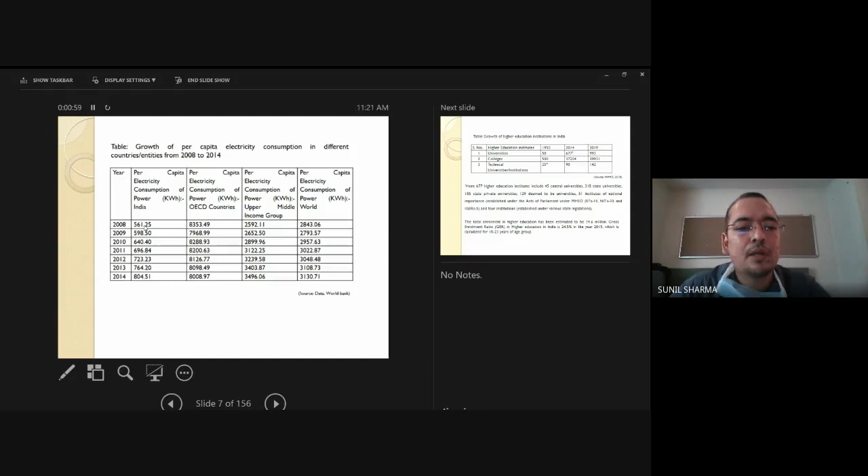And this table accounts for the per capita energy consumption in the Indian context and its comparison with per capita consumption in OECD countries and the world. There is a clear trend that per capita consumption is increasing, although it is very low compared to the world or the OECD countries. But yes, there is a substantial increase. It is growing from 561 kilowatt hour to 804 kilowatt hour per capita.

Likewise, the universities are also increasing. The growth rate of universities has been phenomenal from 1950 to 2019, and the technical universities have also increased 6 times, from 25 to 142.

Need for the study: almost 80% of the educational institutions and 50% of technical institutions were constructed prior to 2011-12, and 1/3 of these institutes have buildings that are more than 2 decades old. The students' intake is increasing. But the Energy Conservation Building Code is not being followed, as the code came into enforcement in 2005 and was then revised in 2017.

Most of the states are not following it, but traditional wisdom was taken into account, and eminent architects have designed most of the institutes. So they were actually having climate responsive buildings. And lack of energy metering at building level is another problem.

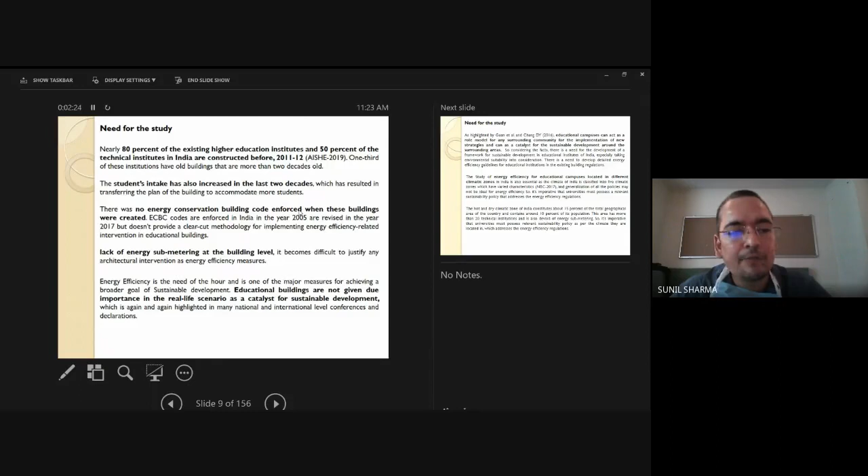And then educational buildings are not given due importance in the real life scenario as catalysts for sustainable development, which is again and again highlighted by national and international level conferences and declarations. Guan et al. and Chang in 2016 have highlighted that educational campuses can act as role models and as catalysts for sustainable development in the surrounding areas. But educational institutions are not given due importance in comparison to other buildings.

Energy efficiency for educational campuses located in different climatic zones is again a very essential part, because India is classified into 5 different climatic zones. So it is essential to have segregated but still comprehensive strategies for different climatic zones.

The hypothesis of the study is that implementation of appropriate architectural design significantly increases energy efficiency and reduces energy consumption in technical educational buildings in the hot and dry climatic region. So the research questions I was taking up are: the factors affecting energy consumption, the characteristics of existing educational buildings, the benchmarks related to educational buildings in hot and dry climate, and the appropriate design measures that can be incorporated for improving energy efficiency.

So likewise, the aim was formulated. The aim is to evolve strategies for achieving energy efficiency for technical institutional buildings located in the hot and dry climatic region of India. To fulfill the aim and the research questions, some research objectives were formulated, like to identify the scenario of energy consumption in technical educational buildings in India and specific to the hot and dry climatic region,

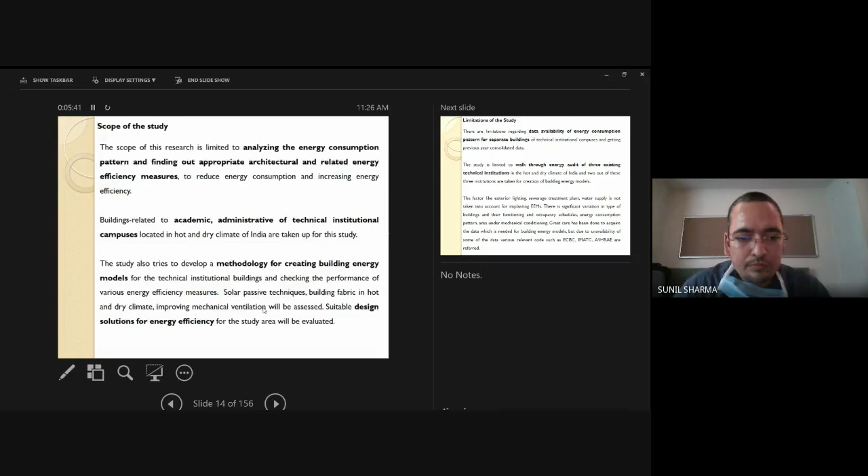The limitation is related to the data availability of the energy consumption pattern for separate buildings. The study is limited to walk-through energy audit only of the 3 existing institutes. The factors like exterior lighting, sewage treatment plant, water supply are not taken into account for implementing energy efficiency measures.

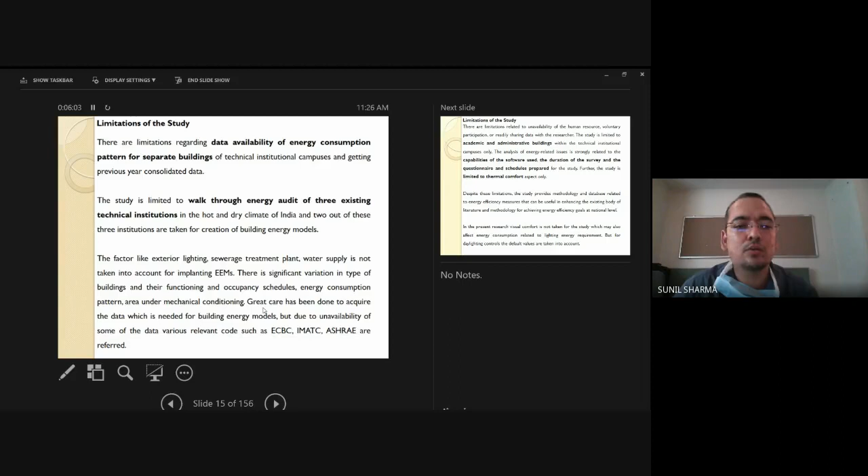And the study is strictly limited to academic and administrative buildings, or it may be a combination of academic plus administrative. The analysis of energy related issues is strongly related to capabilities of the software used, and in the present research, the visual comfort is not taken into account, and only the thermal comfort is taken into account.

Literature review. A vast literature review is carried out related to modeling building energy and calibrating the models, energy efficiency measures related to educational buildings, consumption pattern in multi-user buildings, role of various building elements, especially related to space type, which can be developed for benchmarks. Various codes and standards, sustainability declarations, policies, green rating systems, and software tools that can be used for simulation are studied in the literature review.

There are 3-4 important papers that I want to highlight that become, you can say, the backbone of the thesis through which important decisions are taken up. Like from this sustainability analysis paper, the various strategies like bottom-up approach, top-down approach or hybrid approach. So a bottom-up hybrid approach is taken for the study.

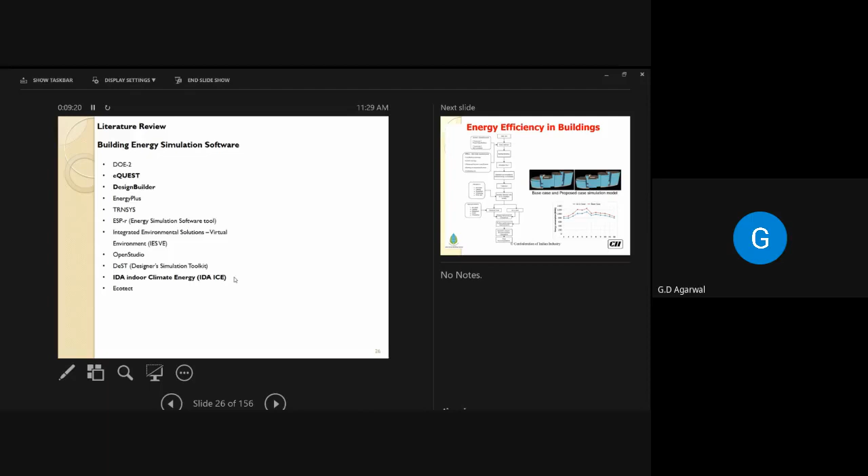Kindly mute your voice, because there is a disturbance. Kindly please mute your voices. There is a presentation going on.

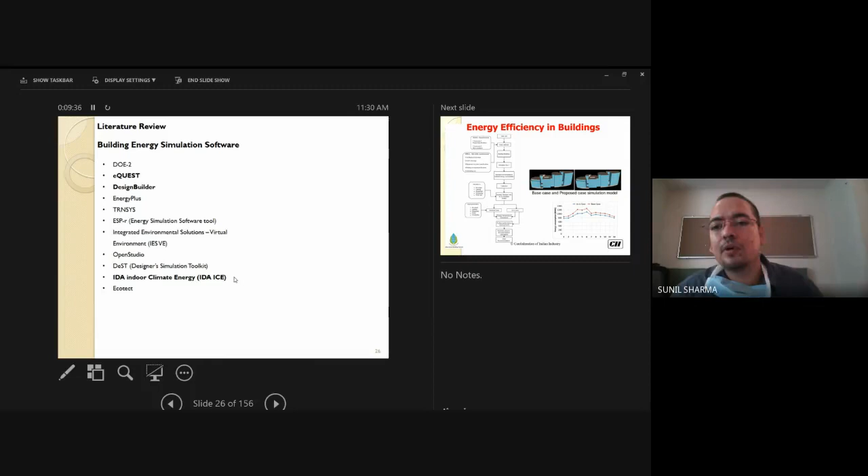So, literature review. For building energy simulation software, there are n number of software tools available, out of which eQUEST, DesignBuilder, and IDA ICE are favored by architects. And this is the flow chart given by the Confederation of Indian Industry. This talks about how you can conduct energy efficiency in buildings. So there is an established methodology, but this methodology is specific to a single case building.

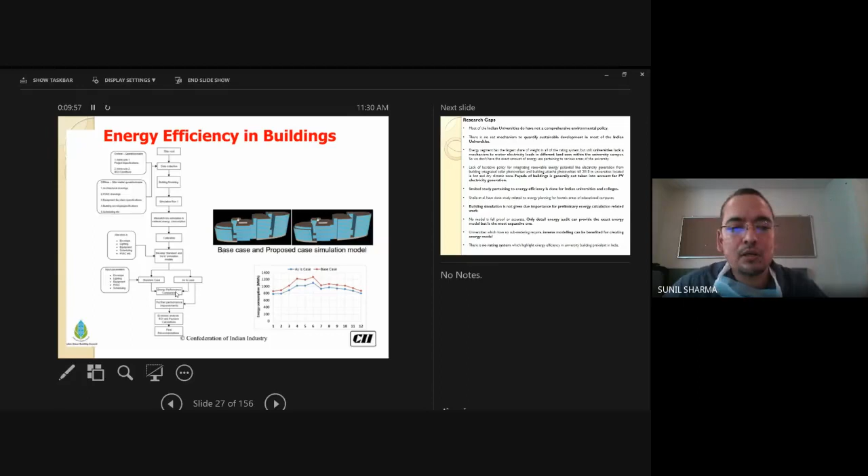Now, through the literature study, gaps have been found, like Indian universities don't have a comprehensive environmental policy. There is no set mechanism to quantify sustainable development in most universities. Universities lack mechanisms to measure electricity load in different land uses or different typologies of buildings. And prior to 2018, most universities, specifically in the hot and dry climatic region, did not have solar PV panels. Further, facade integration, building applied photovoltaics, is also not taken into consideration.

And there is a dearth of studies pertaining to energy efficiency in hot and dry climate, specifically in the Indian context. There are some studies, like Sela et al. has done a study related to the hostel blocks of the university. So most of the administrative, or the labs or the academic areas, are generally ignored.

Building simulation is not given due importance at the beginning of the energy efficiency work. And although only the detailed energy audits can provide the exact model, they are also expensive. Inverse modeling can be used for creating energy models in universities where sub-metering is not available. No rating till date is highlighting energy efficiency in university buildings pertaining to India. So these are the gaps.

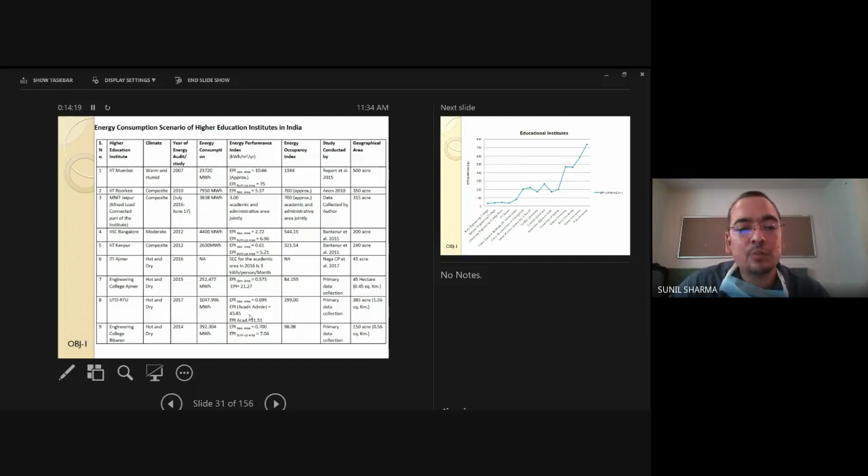You can say that there is a lot of variation in higher level, tier 1 institutes. They have a higher energy occupancy index as expected, because a lot of sophisticated equipment is there in these universities, and for ITI Ajmer it is not available at all. For my case studies, RTU Kota has almost twice that of Engineering College Ajmer and Engineering College Bikaner. As far as EPI is considered, for Bikaner it is just 7. For RTU Kota it is 43.8. So there is a lot of variation even within the state universities.

So the inference is that most of the tier 1 institutions have substantially larger consumption than the 2nd and 3rd level institutions. The EPI in comparison to educational institutions shows that Indian institutions have comparatively less, or very less. For the study area, the hot and dry climatic region, which constitutes around 15% of the area and 10% of the population, is taken up for the study.

This definition is taken from SP 41: the areas having temperature more than 38 degrees Celsius and relative humidity less than 40% prevailing during the hottest month of the year are classified as hot and dry. Here you can see the map of India taken from NBC, and this oblique shaded region is the hot and dry region, which covers most of Rajasthan, Gujarat, Saurashtra, Vidarbha, and some areas of MP and Maharashtra adjoining Rajasthan.

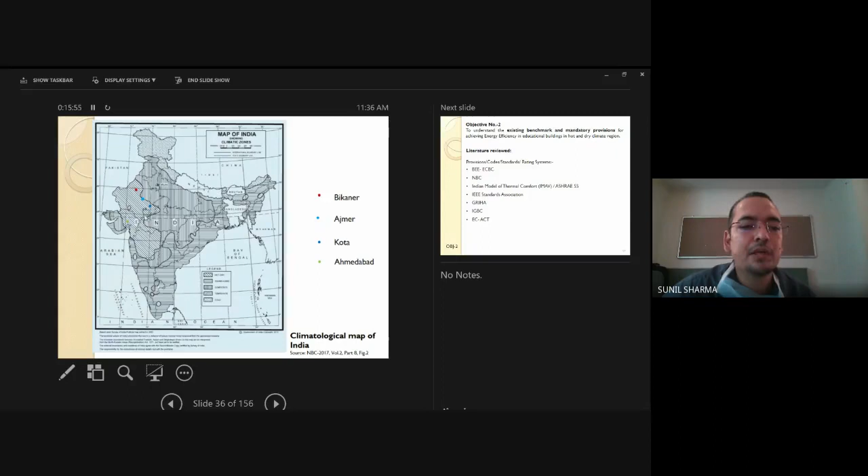For objective 2, to get the energy benchmarks, Bureau of Energy Efficiency codes like ECBC were taken up. NBC was studied. The Indian model of adaptive thermal comfort was taken up, IEEE standards, GRIHA, IGBC, and the EC Act. The EC Act provides a legal framework for energy conservation. Then the ECBC code: for the Bureau of Energy Efficiency, there are no set guidelines related to EPI of

universities or school buildings. Although there is an energy management guidebook, it provides recommendations related to energy efficiency, but does not give benchmark values. For commercial and institutional buildings they give 150, 170. These are on the very high side compared to my preliminary findings for my study area, which were hovering around 20 to 30. So again, the EPI given by the Bureau is on the higher side for institutional buildings.

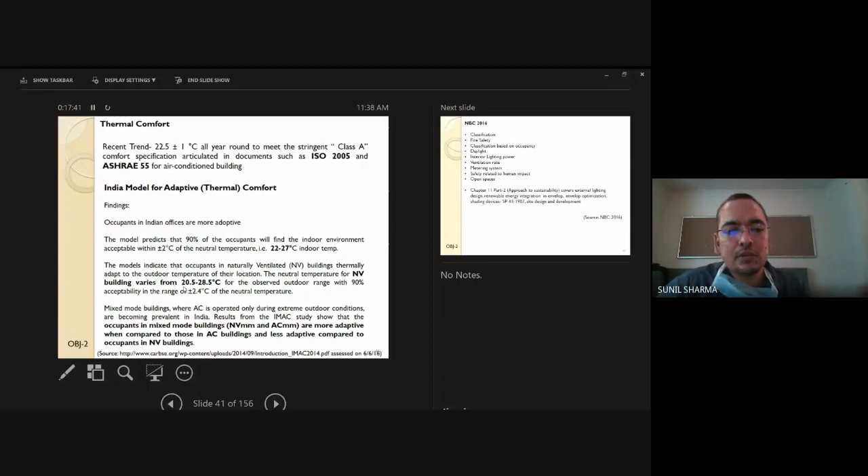For thermal comfort, the Indian model of thermal comfort is taken up, developed by CEPT University, and this is an ideal platform to apply it, because most of my buildings are naturally ventilated. 90% of my building areas are naturally ventilated. So boundary conditions of 20.5 to 28.5 degrees Celsius are taken up.

So again, it's not ideal to take any of these benchmarks. If you take 140 as a benchmark, it means our buildings are super compliant. If you take ECBC, then they become super ECBC compliant, but that is not the actual case. So that is one of the reasons the study is taken up.

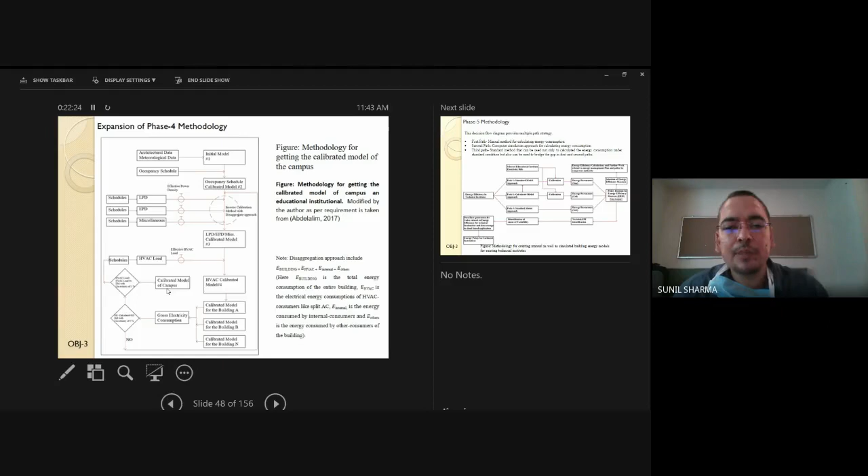If it is not, then I have to check the schedules of the HVAC equipment installed in my building. So there is a complete chain, and there are 2 checks involved. This is how the manual model was initially created, so that data is available for further simulation work, because simulation has a lot of parameters, and these manual computations are necessary to fulfill some parameters which are not found through the survey.

And then we can run the energy efficiency parameters, and then we can do the analysis, and then finally the database can be generated for the university, which can be the base for the energy policy for that particular institution.

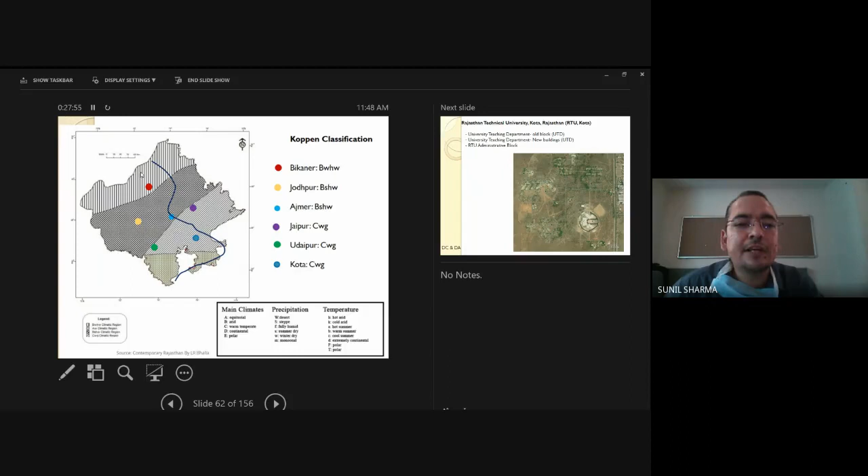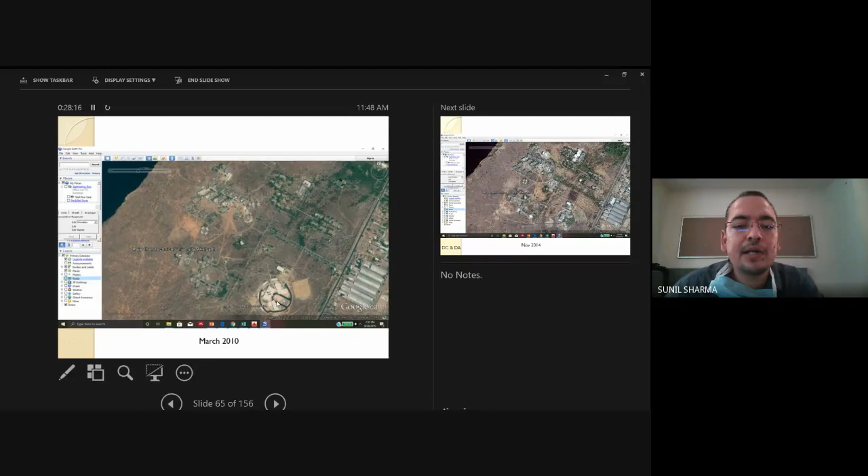Now this is Kota. This is 2005. You can see this is the old academic block known as UTD, University Teaching Department. There is nothing here. Now here in 2010, the administrative block came up with VC building, registrar office, examination office, and sports complex. Then the computer department came up in 2016.

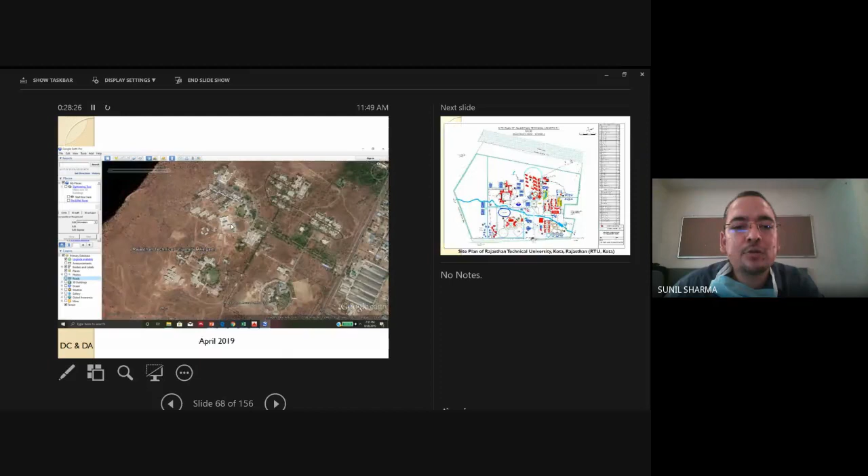And in 2019, there is another petroleum department that came up. So this is the master plan. These are the glimpses of the university.

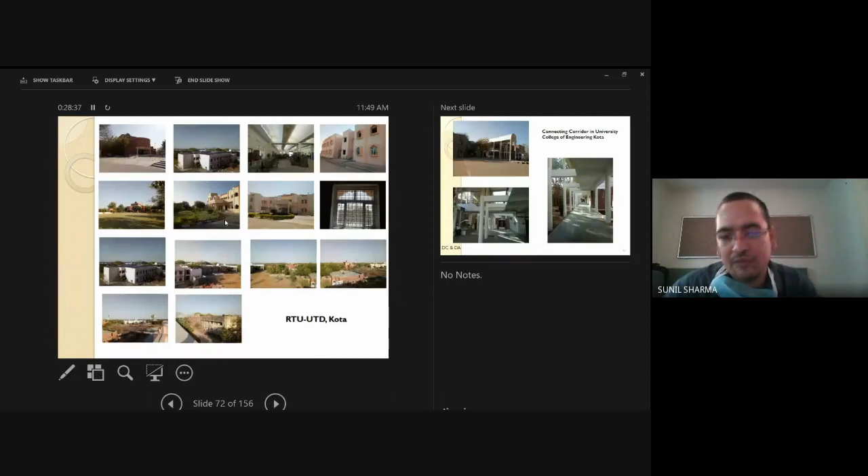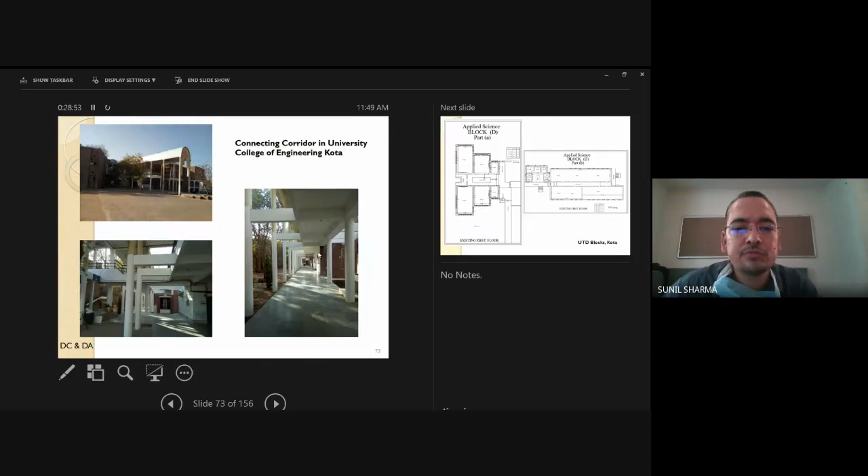I will just highlight that they have these vaulted corridors, double height corridors to connect the old buildings. So the old structure has some kind of architectural motifs. This is again corridors which are connecting different blocks. These are the maps. This is a newly constructed building, the computer department.

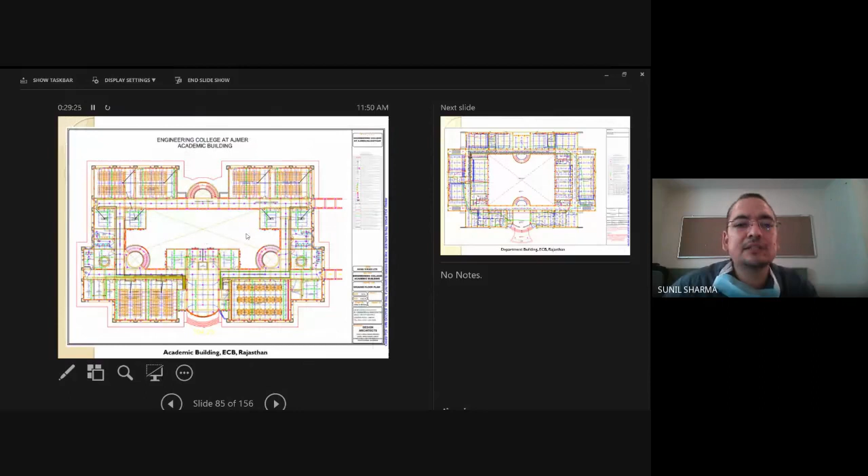Here you can see that courtyard buildings are there. So the academic and the department, two buildings are studied for Ajmer. They have courtyard type of planning. This is again a very striking feature, the shaded corridor and the western facade.

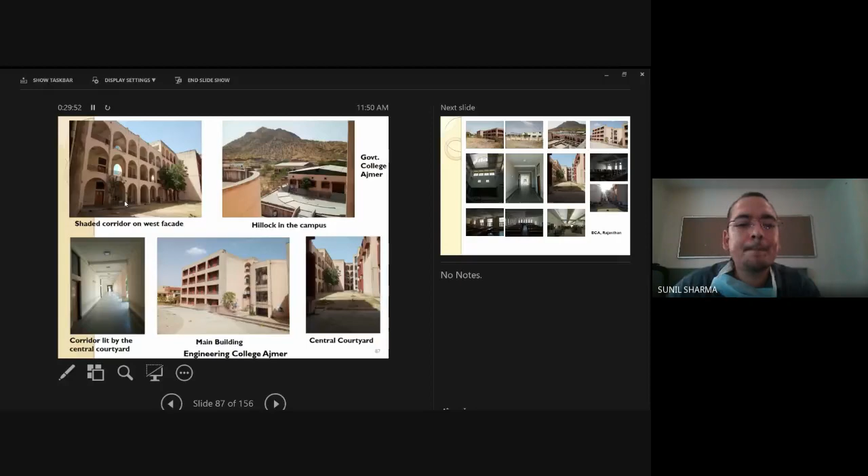Although the timing of this building is such that this west facade is not able to get any kind of function because the institute gets over around 2 p.m. And this is Bikaner, that is left out due to some data availability problems.

Most of the institutions are devoid of updated data related to the building-wise connected load. So this is one of the major hurdles that I came across. That is why I needed to go to each and every room to do the manual calculations for the manual model.

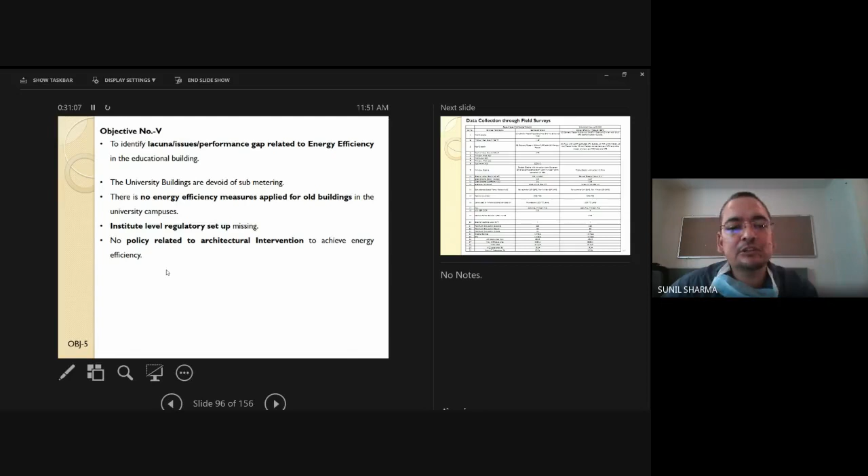Now, the lacunas found are that no energy efficiency measures are applied to the old buildings. An institutional and regulatory level setup for implementing energy efficiency is completely missing, and policies related to architectural interventions are not there. So these are the major lacunas, and this is how I collected the data through field studies for different buildings, various parameters.

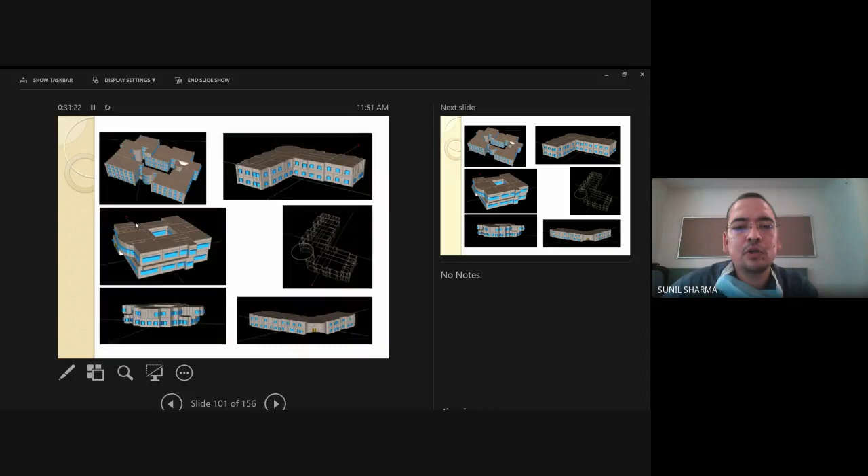These are the models that I've created in eQUEST. In all, 12 buildings are taken up. Now, after doing this, I have decided the values for the EEMs.

That is again important, so I compared the buildings of Kota and Ajmer with the ECBC components - that is ECBC compliance, super ECBC, and ECBC plus. And then I have come up with some concrete information about what exact intervention I need to do.

In case of LPD, say, I had decided that LPD needs to decrease by 40%. So for example, in RTU Kota, in old buildings like Block A, B, C, D, if they have LPD of say 5 watts per meter square, and if it is coming close to ECBC super compliance, say super ECBC is 4.2 and my readings are coming to 5 watts per meter square, then I will go for super ECBC. It means I am taking up the next higher level.

Similarly, for fenestration, I have gone for a higher level. For wall and roof, 1 inch, 1.5 and 2 inch - these three are taken care of, but since the building envelope was too massy, 1 inch was taken into consideration, which was able to cross whatever I had taken up for that.

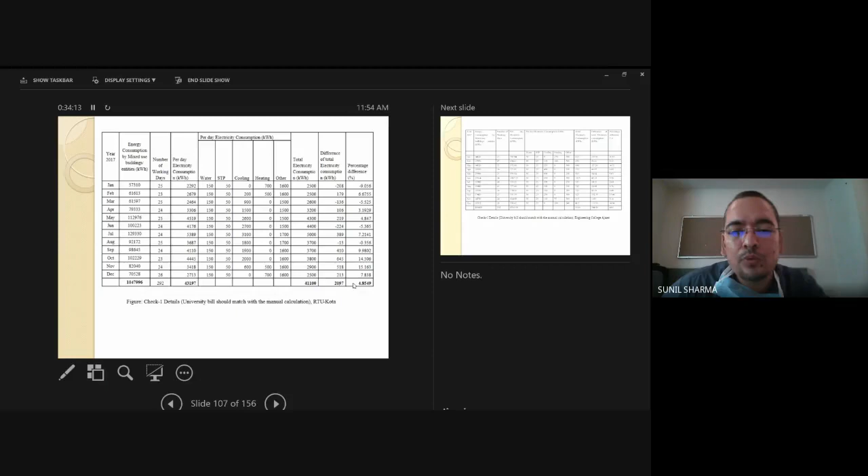And this is how I was able to reduce this 3 iterations and simulation model gap up to 4.85%, so within my limit for RTU Kota. And for Ajmer it was around 4.05. So once I achieve these tolerance limits, now I can say that my model is calibrated.

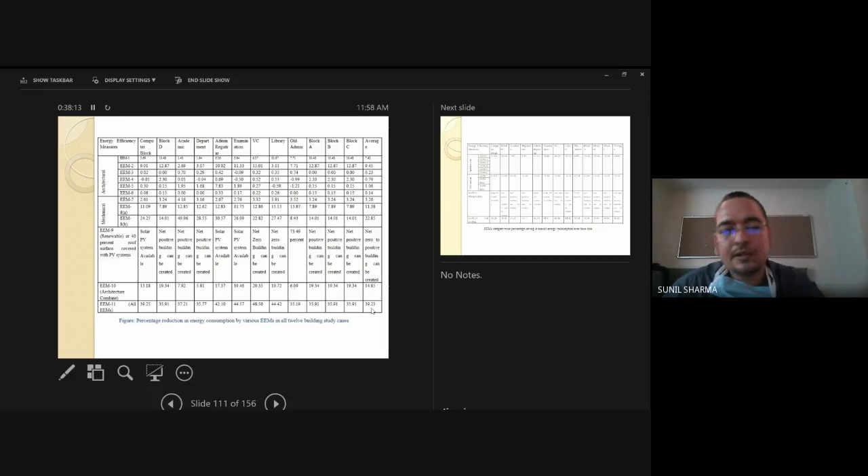This is the cumulative effect of all the 6 for individual buildings. So more or less the mechanical part in this—I want to specify that 8A and 8B, out of these two, only one is considered.

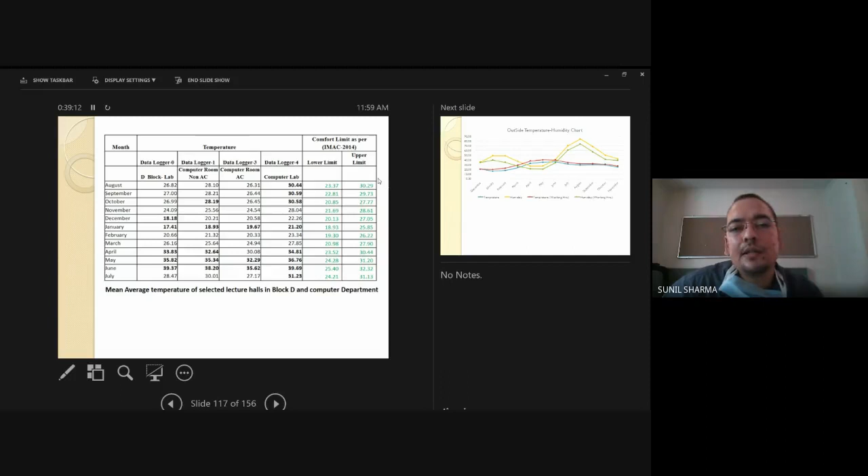Now this is the Indian model of thermal comfort, and this is the data I got from the 4 rooms, and these are the limits as per IMAC. The bold temperatures mark the areas where the room was showing readings out of the comfort limit.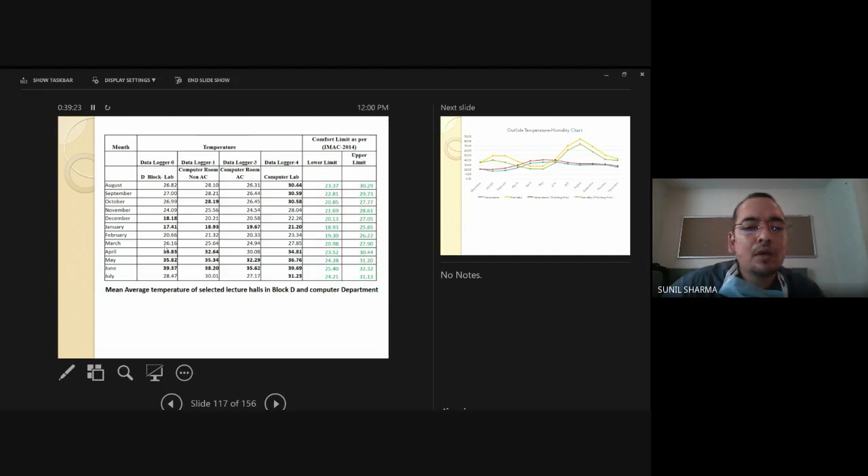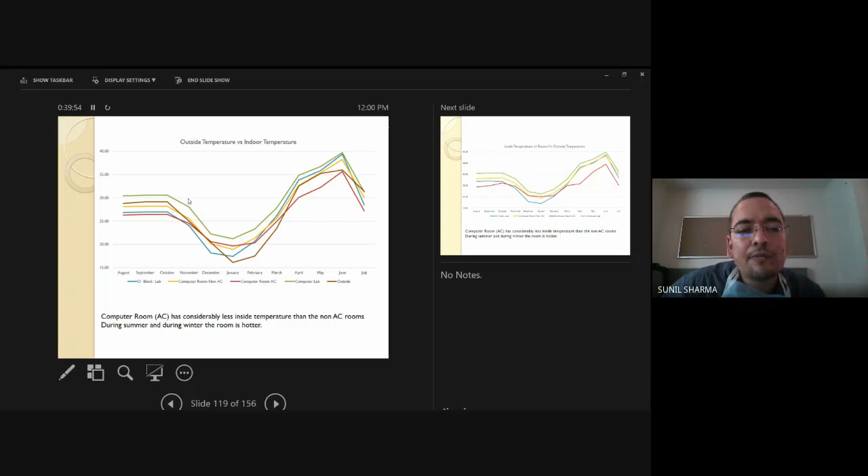So this is the temperature humidity chart. Here you can see the computer room AC is clearly showing low temperatures—this is the computer room. So this computer room is on the lower side, meaning the temperature is generally lower than in the labs which don't have air conditioning units.

So this helps me find out the set point temperature in some of the rooms, and I was able to use that set point temperature in my simulation. AC rooms have on average around 25 to 26 degrees Celsius when the building is in operable stage, and non-AC rooms generally have average temperatures beyond the thermal comfort limits in the months of April, May, June, January, and February.